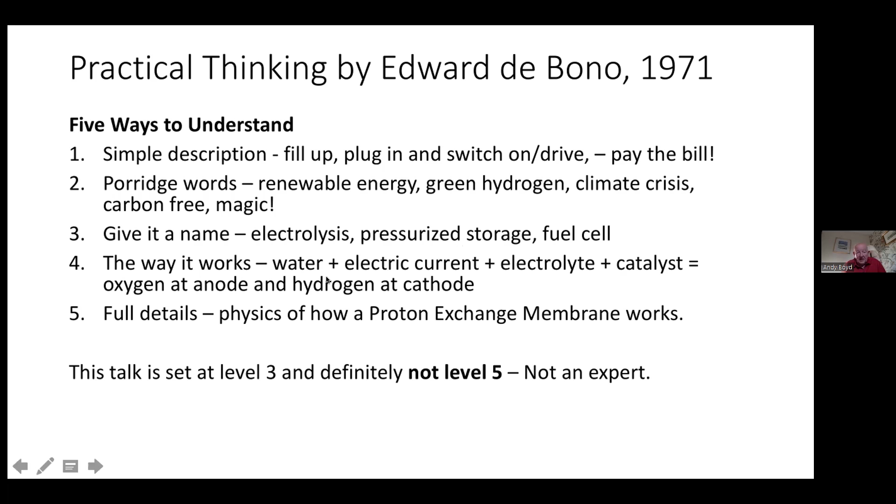So when you see these words, electrolysis and pressurized storage and stuff, don't really ask me the full details of how proton exchange membranes work, because I don't know.

Just a little bit about sustainability. Sustainable projects make things better today. If they don't make things better today, then why would you do them? And you have to do it efficiently, and you have to bank for the future. So doing something today that makes things better in the future is the banking for the future.

And the final one, the four, which is fairness, because without fairness in the system, people eventually withdraw their support and projects become unsustainable, or governments become unsustainable.

So just moving on a bit, here we are now. The hydrogen industry is going crazy. There's so much going on. Every day there's a new announcement about something to do with hydrogen.

The EU is committed to produce 10 million tons of renewable hydrogen by 2030. And that translates to about 80 billion euros. It's a huge, huge market, potentially.

Scottish Power's committed to producing something called a hydrogen hub in the Cromarty Firth, and there'll be more of these in Scotland. European gas network operators want to create a backbone pipeline network so that they can pump hydrogen all around Europe, and as a forerunner to a trading mechanism.

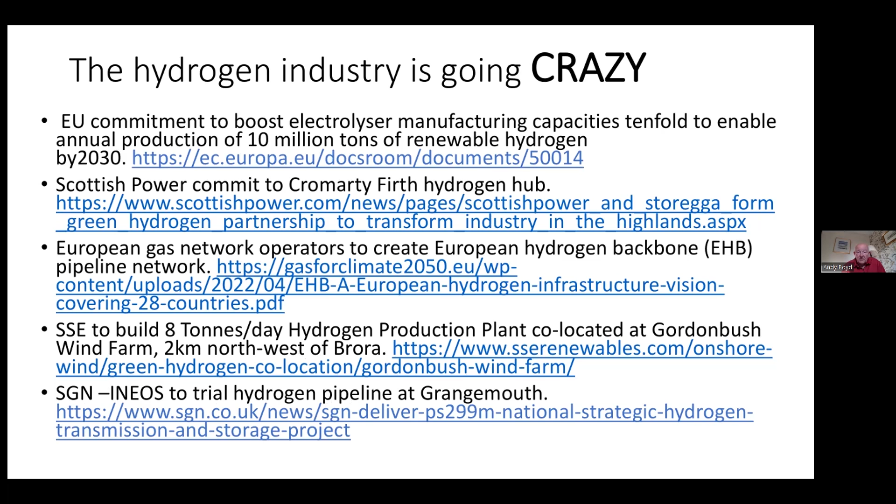So the background: hydrolysis was discovered at the time of the French Revolution, so it's been around for a long time. Hydrolysis coupled to renewable energy gives you green hydrogen. There is blue hydrogen and gray hydrogen. Blue hydrogen is made from hydrocarbons coupled to carbon capture and storage, and gray hydrogen isn't, it's the other stuff. It's been much talked about as an industry for at least the past 30 years, including in Jane's book with Malcolm Slesser, where she's got a whole section on the potential for hydrogen.

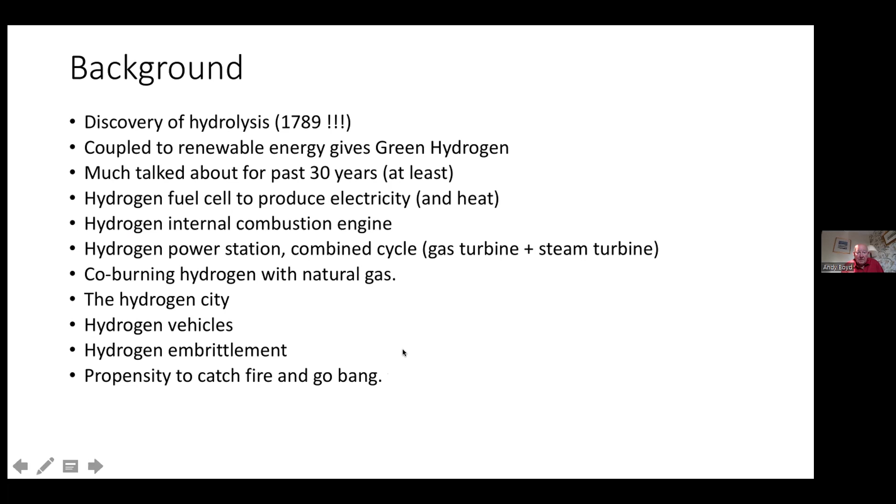And here's why. This is the hydrogen airship that caught fire in 1937. People will cite this as saying why you can't have hydrogen, because you're going to have disasters like this.

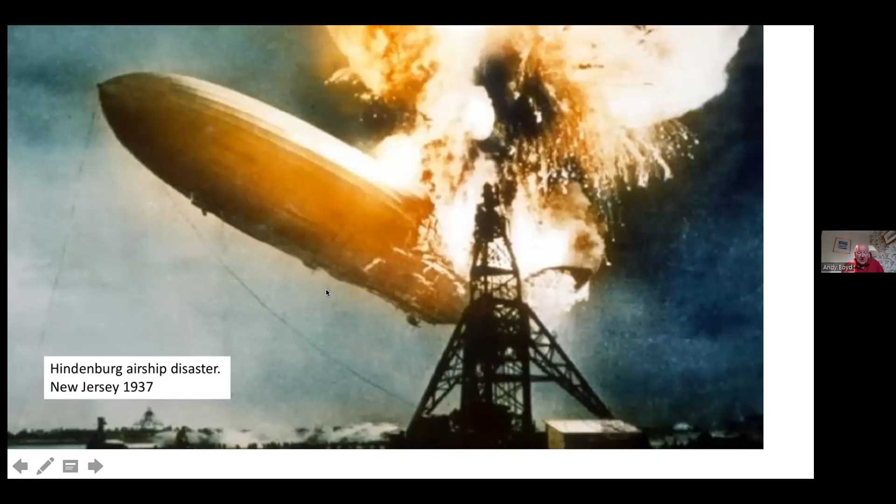More recently, there have been other disasters with hydrogen. At the Fukushima nuclear power station in Japan, there was a hydrogen explosion. Hydrogen was produced in the reactor by a malfunction, which blew the top off the reactor.

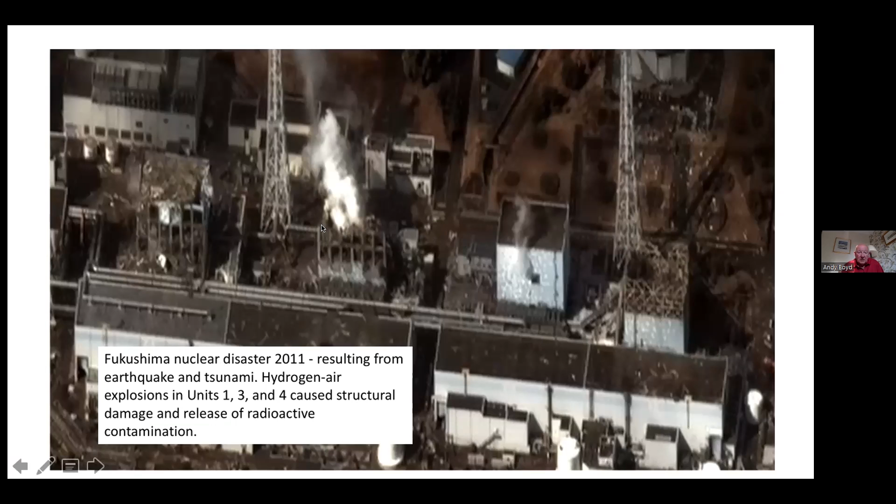And even relatively small scale things, there's something called a hydrogen road in Norway, where there are hydrogen fuel stations for vehicles along this road. And one of them here caught fire. Now, this is very interesting because this hydrogen fuel station makes its own hydrogen. There's a solar farm in the next field, and there's an electrolyser which makes its own hydrogen, and the hydrogen then goes into somebody's car who pulls up here. Very interesting. But it was a valve that went.

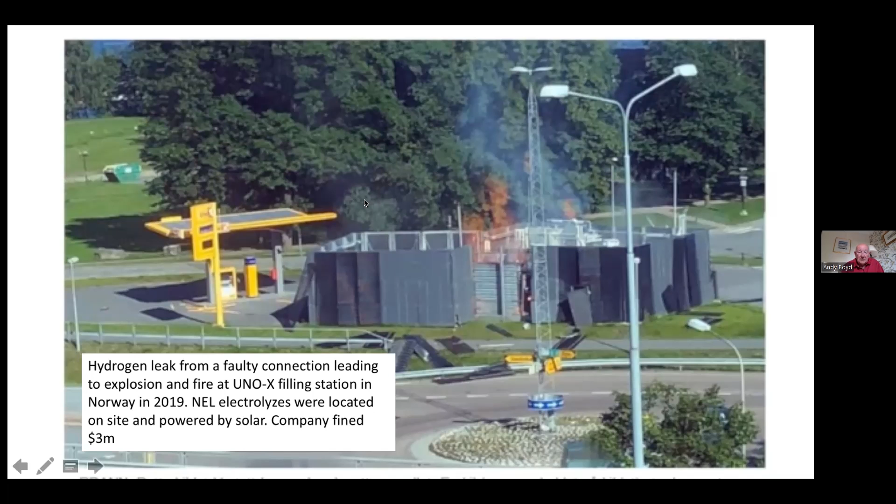So these connections between one bit of the system and another are quite susceptible to leaks, as you would expect if you had one piece of pipe joining another, it's the bit where they join where you're likely to get the problem. So there's been a lot of research and development on different types of joints. That's ongoing, but that's what happens if you don't deal with that.

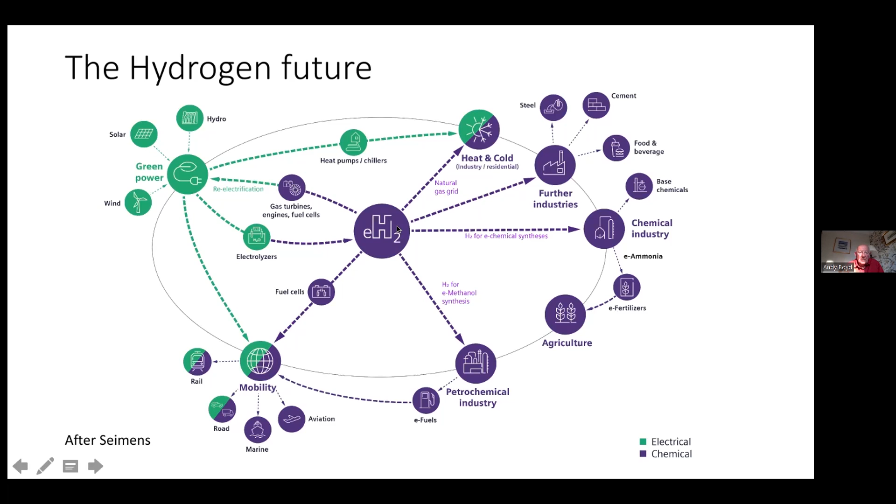We've been through this before, and it's just stuck in again. Now we're going to go on to how you make it through electrolyzers and what you do with it - production and uses.

Water hydrolysis, that is passing electric current through water, produces oxygen at the anode and hydrogen at the cathode, and this is what's called green hydrogen.

They also produce it from methane pyrolysis. That's where methane is bubbled through molten metal, and it breaks down and produces hydrogen.

The most common way of producing it, though, is through steam reforming with methane at high temperature, and that produces grey hydrogen, which can become blue hydrogen if you've got carbon capture and storage. And there are other methods.

So currently, the world production of hydrogen from all methods is about 90 million tons per year. So an EU proposal to produce 10 million tons a year is a significant part of world production at present.

It's used mostly in the petrochemical industry for the desulfurization of hydrocarbons. It's used to make ammonia, which is used to make fertiliser, and it's used for fats and oils, and even in margarine. It's used in the semiconductor industry, as rocket propellant, and all sorts of other special scientific uses. And it's used as an energy carrier in fuel cells and enhanced fuels.

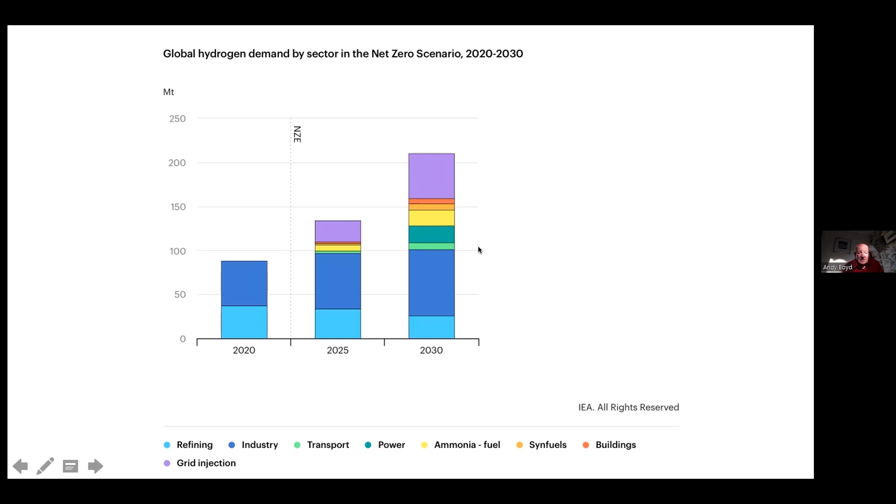So let's just go on to production. How do you make it? Well, there's alkaline electrolysis that's been known about for years - you'll see a slide in a minute - but it's an electrolyte, a cathode, and an anode. You pass electricity through it, and you get oxygen at one and hydrogen at the other.

There's something called a proton exchange membrane, which is a relatively recent development, but it's now become commercially available, widely commercially available. And there's another diagram coming up. But this is the sort of overview of hydrogen production.

The proton exchange membrane method has taken over from these other methods. There's no more Sony system for making whatever it was that didn't become VHS - I can't remember what it's called. But following along is this stuff called solid oxide electrolysis, which might become the DVD of hydrogen production. It's got some good credentials. There's a whole host of other methods coming along, all in research and development, and developing fast. But this proton exchange membrane method seems to have got the jump on everything else.

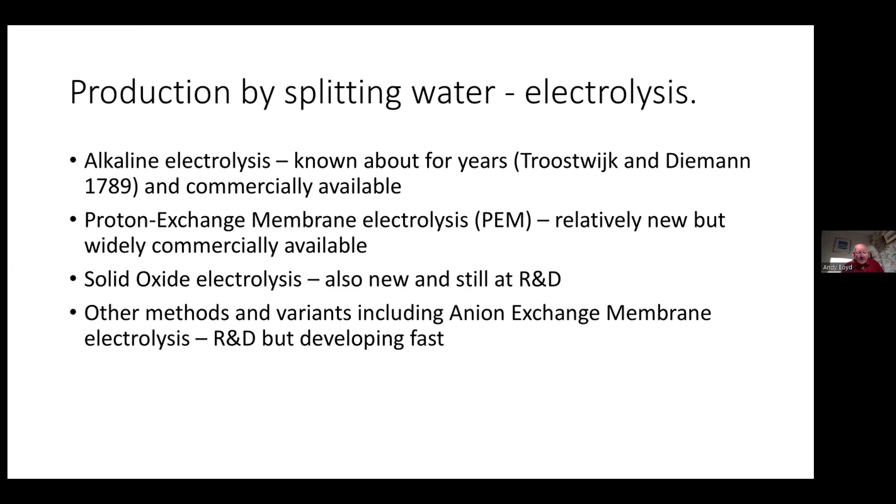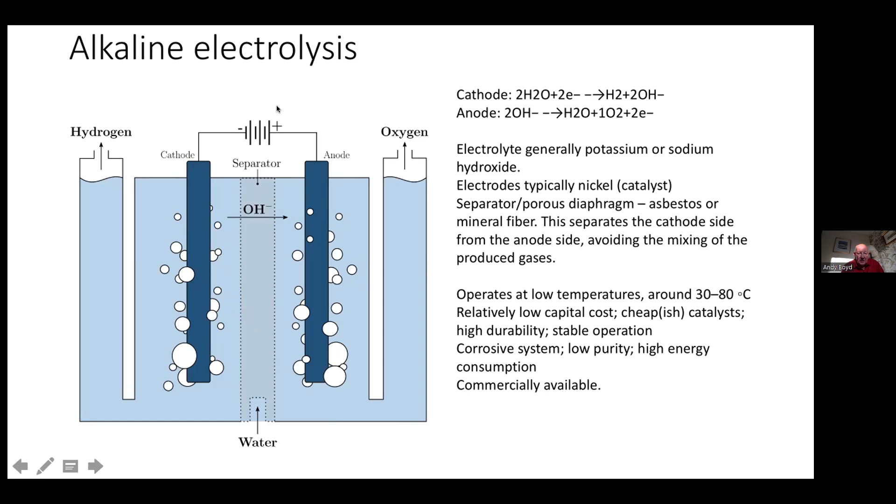So, alkaline electrolysis. This is the liquid method, using usually potassium or sodium hydroxide as your electrolyte. You have a cathode and an anode, and some sort of separator so the bubbles don't mix. You introduce water, and what you get out on this side is hydrogen, and on this side is oxygen. That's a liquid, low temperature process, and that was the preferred approach for years and years, until they came up with this proton exchange membrane method.

This is a plastic sheet. On one side, in fact on both sides but with different metals, are catalysts which become the anode and cathode. You introduce water at relatively low temperature, and this proton exchange membrane allows hydrogen ions to go through, but it doesn't let electricity through. So you produce hydrogen at one side, then oxygen at the other side. This technology is now becoming widely available. Siemens, for instance, have just built a very large factory to produce cells that do this in Berlin, and there's a very large manufacturer of these types of membranes in Sheffield.

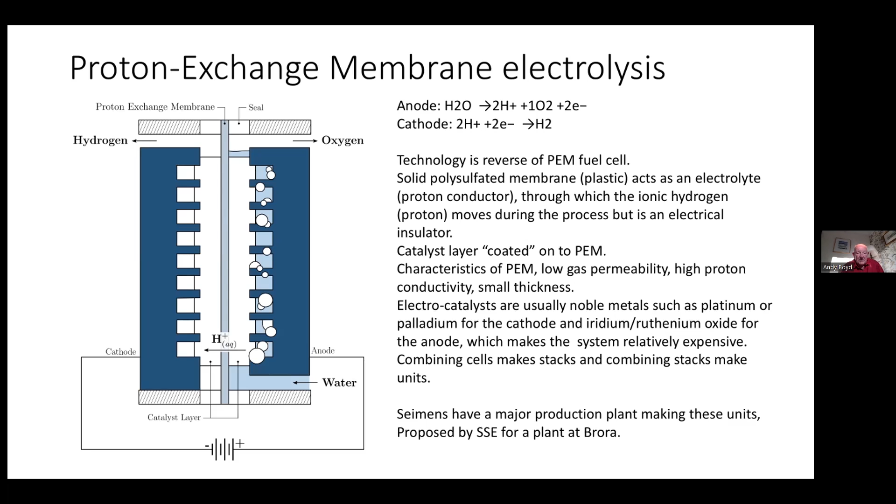The one that might be coming along, the sort of DVD that's going to replace the proton exchange membrane, possibly, but needs to run at high temperature, though has possibly higher efficiencies, is this solid oxide electrolysis method. The great advantage of this is that the cathodes and anodes don't have to be platinum or palladium or other noble metals - they can be a more affordable material, and the stuff comes in as steam. It's high temperature, and this is the sort of method for producing hydrogen they've been looking at in the nuclear industry for linking up to nuclear power stations, where you've got the opportunity for high temperature steam as well.

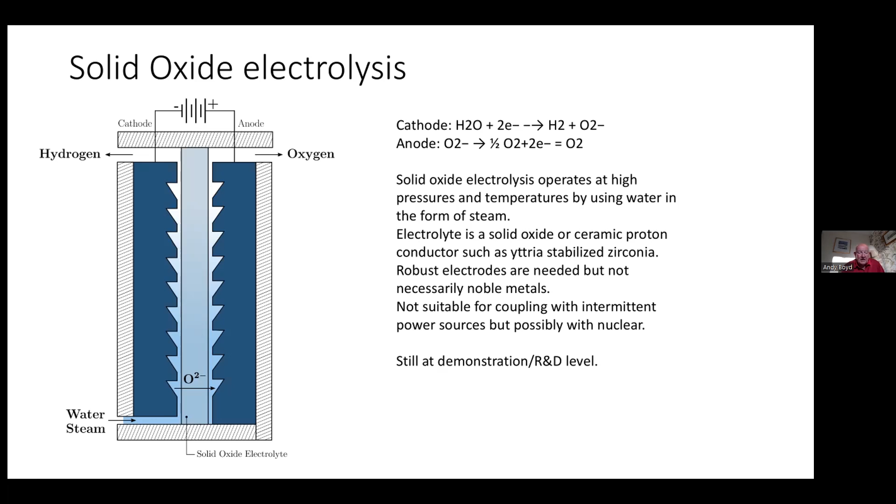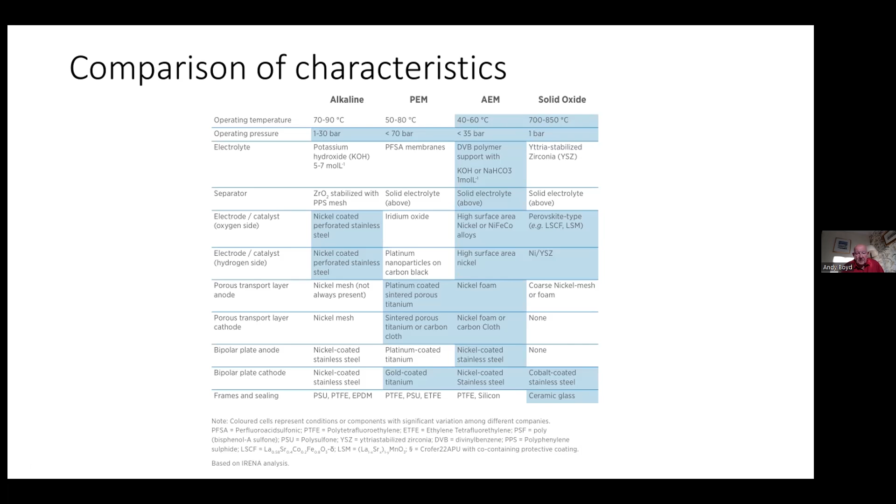This is a busy slide, which you can look at another time if you download the presentation. This looks at some of the differences between the different methodologies. The membrane method is 50 to 80 degrees C. Solid oxide is 700 degrees C. So you finish up with a different type of development altogether.

So the electrolyser is in the middle of this here, but that's not all that's involved in a system. You need electricity coming in, which you've got to rectify to direct current - if this comes in as AC, it's got to become DC. You've got your electrolyser in here, which produces oxygen, and you need to collect the oxygen from the water and take that to whatever you're going to do with it. On the other side, you have to do the same thing with hydrogen. There are various condensates produced, and then you need a gas reservoir, and a whole series of things needed - dryers, etc. - before you get hydrogen. So that bit there is only part of the system.

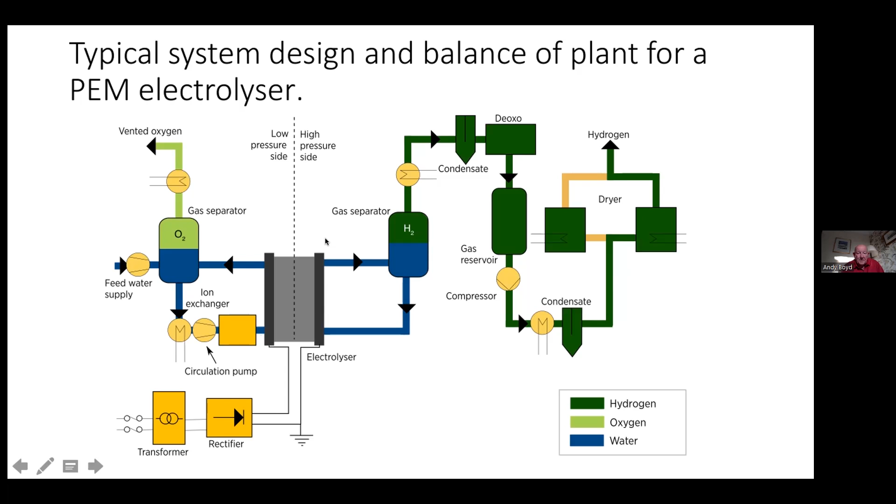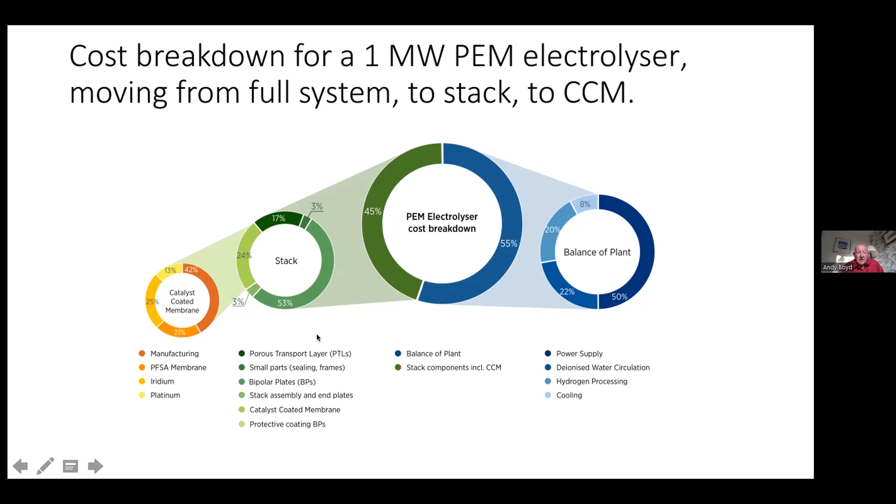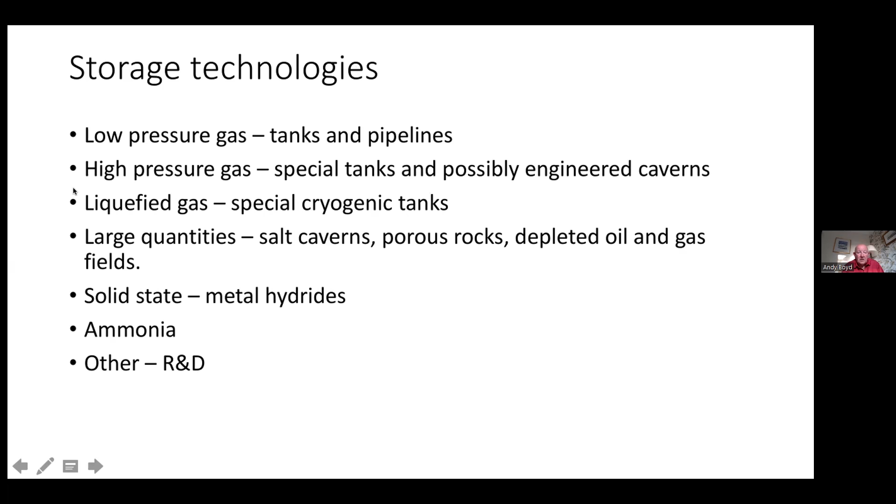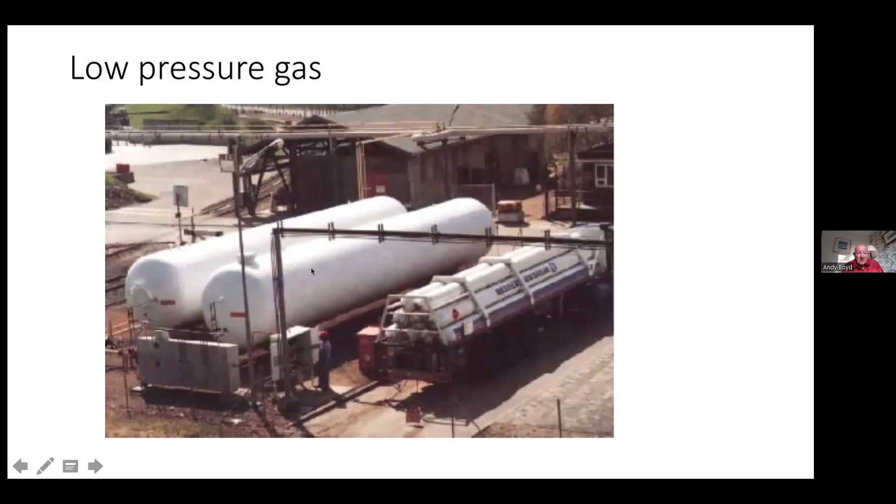So there's quite a lot of work going on about storage technologies. So here's a couple of pictures, some low pressure gas in tanks, which you can imagine as being fairly conventional. This isn't a great picture, but it talks about the complexity of compressed fuel storage tanks. These are the sorts of things that you would have in a bus or in your car, and they're impact resistant. They've got special valving, they're multi-layered, a carbon fiber reinforced shell, and probably a polymer inside here.

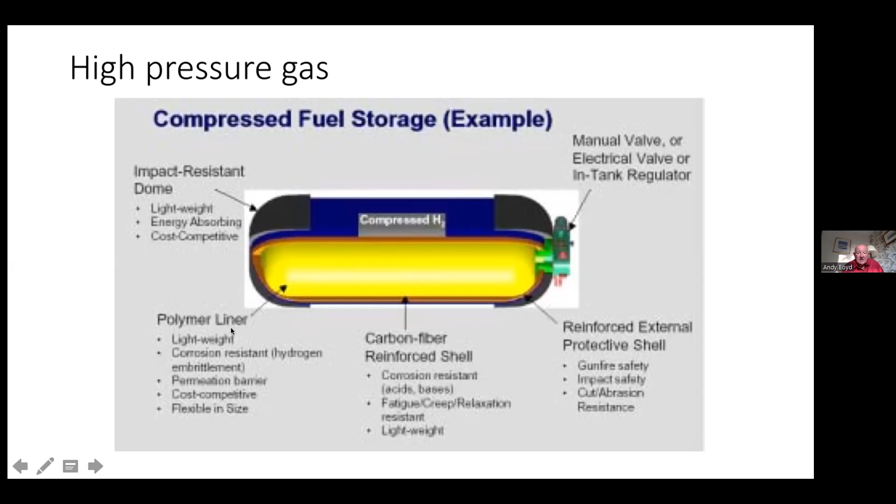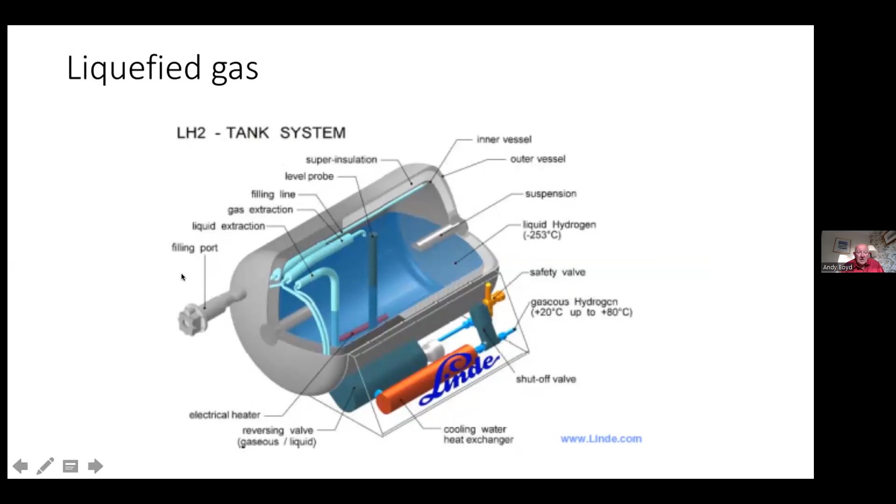And so that's a pretty specialist piece of kit, as is a liquefied gas tank, because that's insulated and gas can bubble off. And of course, when it bubbles off, it takes in energy and cools. And so again, that's a pretty sophisticated piece of equipment. And as I said, in large quantities, you can store it in rock and salt caverns.

And they've already been doing this for years and years at ICI, at Teesside, in some salt caverns. And in France, they've been storing hydrogen in porous rock. And there's talk of using, sorry, I'll go back - there's talk of using depleted oil and gas fields. And then this issue here, which is cushion gas.

So that is, if you put it in there, when you take the gas out, you have to leave some there as a cushion. And I'm not sure I understand that, but it becomes quite a problem at large quantities and in these sorts of places. And as I said, there's solid state storage as metal hydrides in porous medium. And then there's some R&D into various types of carbon-based materials that can hold hydrogen. I'm not sure I understand all this - it's a bit too much chemistry for me, but it's certainly an area for sort of specialist storage of hydrogen.

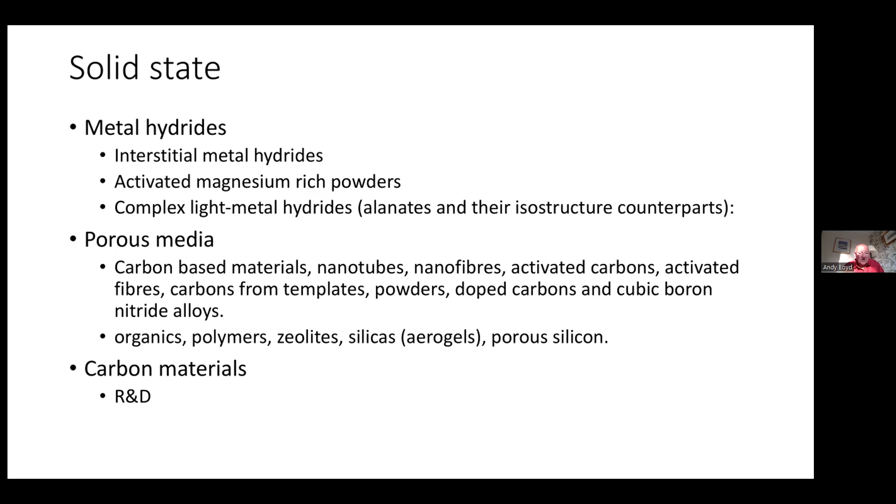So what do you do if you use it? Well, how would you use it? Well, it can be used for heat and power, for civic buildings, schools, hospitals, farms, commercial kitchens. And there you would use fuel cell technology or direct combustion.

Now, a fuel cell is the reverse of the PEM, of the proton membranes. You introduce oxygen, that's air at one side, and you introduce hydrogen at the other side. The hydrogen goes through the gap, goes through the membrane, creates water, and in so doing, drives an electric current between the electrodes. So that's how a fuel cell works, and it produces electricity, but it also produces heat.

So you can have a fuel cell in a container next to your hotel that will provide the electricity and the heat for the hotel, or a couple of containers with this stuff in it. As I said at the start, it's future use in heavy vehicles and buses and ships and cars and possibly airplanes. And again, this is fuel cells and internal combustion engines. So you might have ships running on internal combustion engines that are burning hydrogen.

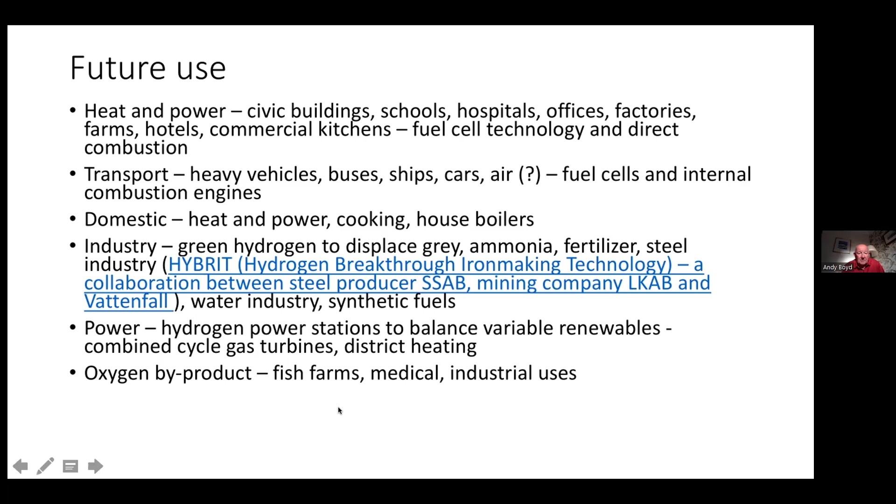So let's go on to ammonia. Ammonia is hydrogen and nitrogen - that's one nitrogen to three hydrogens. The nitrogen comes from the air. You produce this liquid, and then you ship the liquid, and you can store the liquid in tanks. They've been storing ammonia for ages, for years and years.

You then turn your ammonia into fertiliser and other industrial chemicals, and it's relatively safe. And then at the other end, when you've got your ammonia, you can break it back into hydrogen and nitrogen. It needs some more energy going in, but the round trip gives you an efficiency that looks viable. Ammonia is also a fuel, and you can burn it in internal combustion engines.

There's been a lot of interest in using ammonia as a fuel for ships. This site I've cited talks about speedboats. At this conference in Glasgow that I went to a few weeks ago, there was an ammonia-powered speedboat, which looked like something Batman would drive. It was a fantastic-looking machine, and it burnt ammonia.

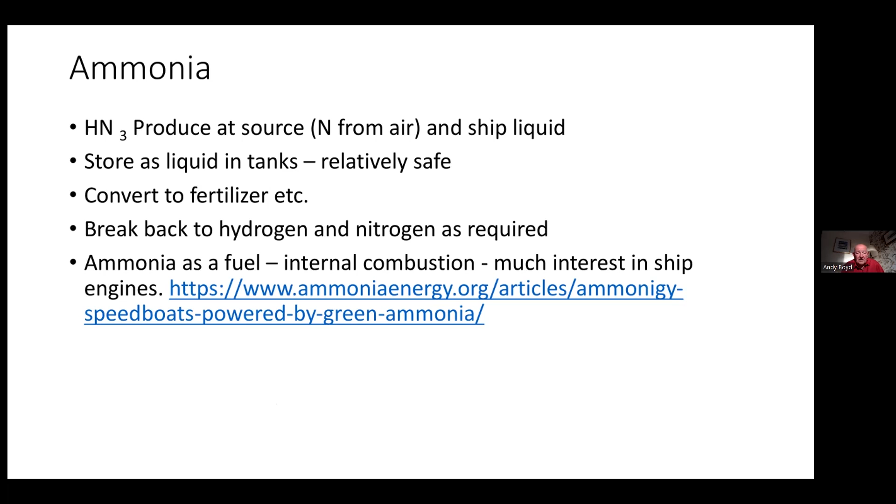Now, the problem with ammonia in an internal combustion engine is that it burns much slower and needs a higher temperature than petrol. So it doesn't really work very efficiently unless it's in slow-moving internal combustion engines, like ships' engines.

Okay, I'm just going to move on to some other terminology that's emerging - these terms of pods, hubs, and valleys. I think I've probably invented the term pod, because this is where green hydrogen is produced, and it may be used locally, or exported or collected and then moved on to somewhere else. A pod at present would be the proposed development at Brora, and the quite extensive developments on Orkney, though it doesn't count small dedicated production units which might come up.

I could imagine there being 100 plus, maybe 200 pods around the UK where there is abundant green energy. Now, hubs are centres for hydrogen collection, storage, and onward transmission, and they may include a pod or two, and some local usage. But you might get new industry using hydrogen, such as making ammonia. I could see there might be half a dozen of these in the UK, perhaps half a dozen in Scotland, and perhaps 20 in the UK.

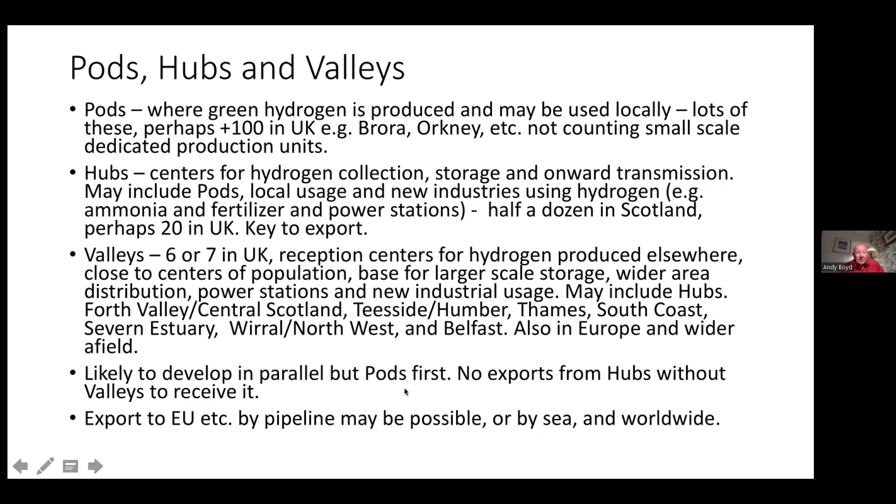So this is my next one, which is industrial supply: pods to hubs to valleys. Pods to hubs can be perhaps a short pipeline or tankers. Hubs to valleys, some sort of specialist dedicated pipeline, either a new submarine pipeline, which would be much cheaper than an onshore pipeline, or possibly repurposed gas pipelines, although I'm not convinced about that.

You could ship it as ammonia, or you could ship it using new ships to new terminals and new storage facilities. This is a picture of the world's first liquid hydrogen carrier.

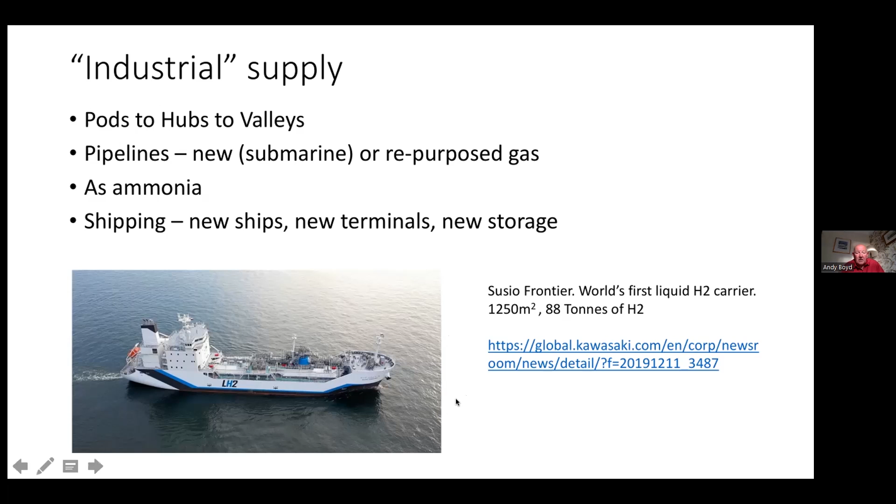It's got a tank of 1,250 cubic meters, which is not that big, and it only carries 88 tons of hydrogen. It caught fire a few weeks ago, and the fire came from one of these connections between one bit of pipe and another. So this whole question of connections and valves is an ongoing challenge for safety.

Domestic supply, and I say domestic because it's the sort of thing where natural gas would go now. There's a lot of talk and proposals from the gas companies with vested interest that they should blend it with natural gas and deliver via the existing gas network, with a large amount of storage in the pipes themselves. But the feasibility is not yet fully proven.

But old town gas supply included a lot more hydrogen—got a high hydrogen content. So there's some feasibility in there, but how it works

is being developed. You could build dedicated pipelines, and there are some dedicated hydrogen pipelines over long distances in the United States. But the best technology is still a subject for R&D, and they'll be costly onshore and cheaper offshore.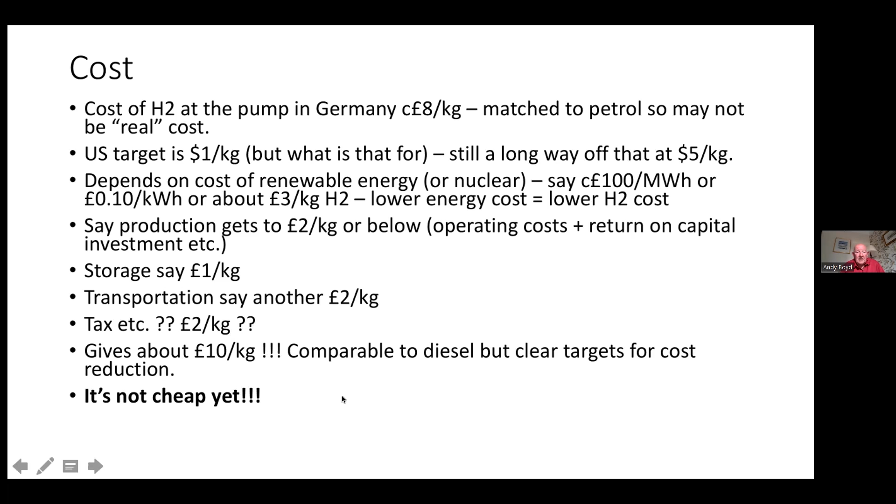And then I'm guessing again at another number for storage, because you've got these tanks to pay for and to hold, and then you've got to shift the stuff around. And before you know where you are, you're going to have some tax. So it's £10 a kilogram. Maybe it isn't as much as that—maybe you can get it down to £5 a kilogram—but it's not cheap yet. This isn't free power. Quite a long way short of it at present.

So what does a green hydrogen future look like then? Well, here are the drivers: the politics, the policy, strategy and plans. The obvious drivers are climate change and decarbonisation. There's also energy security, as we all know about with Ukraine, etc.

People are trying to reduce the cost of energy, developing new green technologies to take over from the old-fashioned technologies, to create green jobs with the potential for export. And of course, the export gives a potential new public revenue stream, which the government's really interested in if they can find something else to tax. And when you look at something that might be an £80 billion industry within 10 years, there's a lot of investment profits that people are interested in. So there's quite a lot of powerful drivers there.

And you say, well, how will the market develop? Well, I don't know—I've got a couple of slides that come onto that—but there isn't a market at present. And for a project to be considered bankable, the green hydrogen projects will require an association with an offtake contract, with a credit-worthy offtaker. So you can't sell it to somebody unless somebody's going to buy it, and you can't invest in the project unless you've got somebody to buy your product.

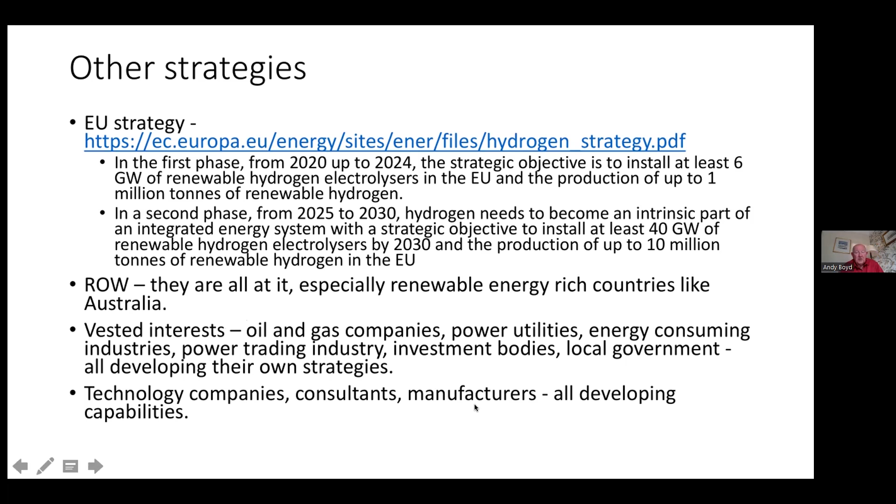The rest of the world are all at it, especially the renewable energy rich countries like Australia and North Africa, the Middle East — anybody who's got relatively inexpensive renewable energy. Then there's all the vested interests: the oil and gas companies, power utilities, power trading industry, investment bodies, local government — they're all developing their own strategies. There's quite a lot out there about what people want to do and what should be done by way of creating a market, and lots of technology companies, consultants and manufacturers are all developing their capabilities. This is growing at an enormous rate.

There are wholesalers who buy from these producers, and retailers who also buy from them, so there are people who make a living just trading hydrogen. Their suggestion is that they'll trade hydrogen through things called hydrogen purchase agreements and carbon offsets — so there could be a whole financial industry developed similar to the electricity industry, all adding cost, via these hydrogen purchase agreements or other sorts of wholesaler-type agreements.

There would also be a safety regulator, likely the Health and Safety Executive, and a market regulator — is that going to be Ofgem, or H-gen, or something? I don't know, but that doesn't exist yet either. Of course, the Treasury would love to get its hands on this because it's tax revenue, and there might be some rebates depending on the arrangements — you tax somebody, but somebody else gets a rebate.

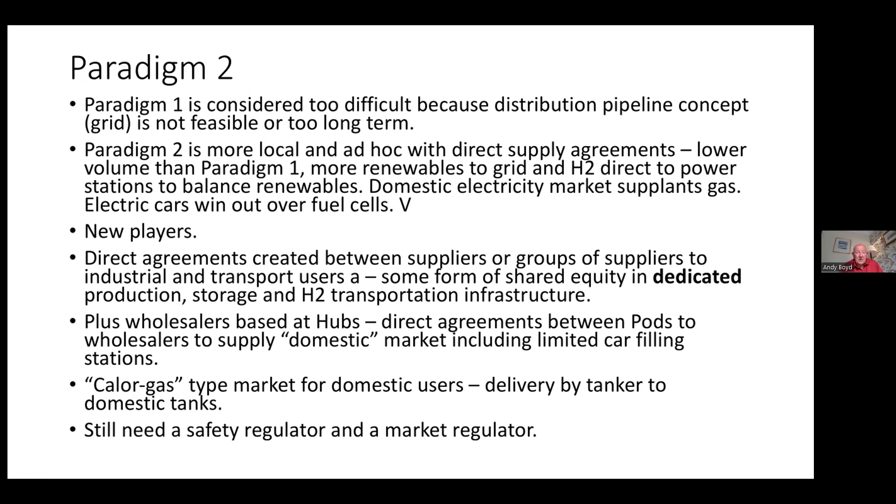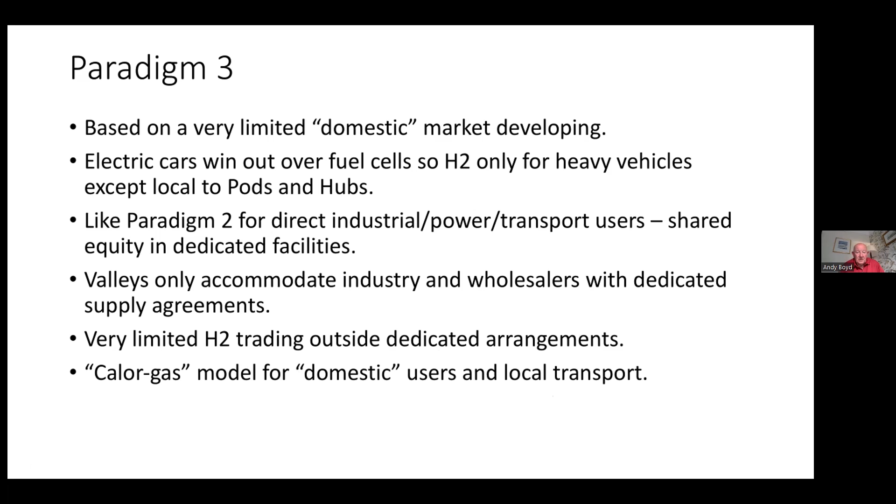So you might start with something that looks like number 3, move on to something that looks like number 2, and eventually finish up at number 1. But it's all too complicated.

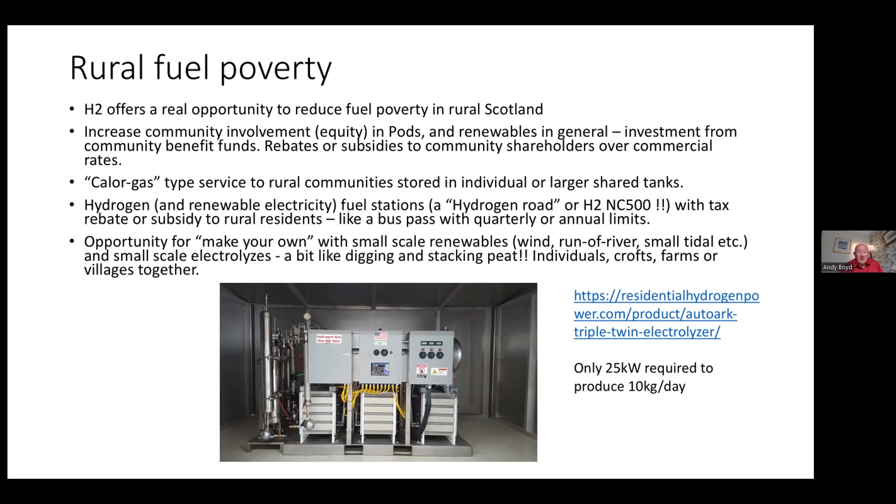All right, so I'm coming towards the end now. This stuff is happening very quickly. There's so much going on in the industry now, it's very difficult to keep up, and it's just going to keep getting faster and faster. There are very strong industry pressures because there's lots of money to be made out of this. I think the politicians are slow to keep up because there's actually quite a lot of science in this, and it's not certain what's going to happen. There are lots of technology developments, but some market leaders or some technology leaders are emerging. So if we come back here in 3 or 4 years' time, the politicians might have caught up and the technology might have settled down a bit.

Safety regulation is coming along, but it's a big difficulty, especially if you need new legislation, and the whole question of safety standards is very, very difficult for people to develop. And you've only got to get one fire or one explosion, and the whole safety regulation goes into question. I think there's a great danger of getting things wrong in this turmoil. I think that politicians and technologists can take the wrong direction, and I think there'll be some people falling on their face as a result of this.

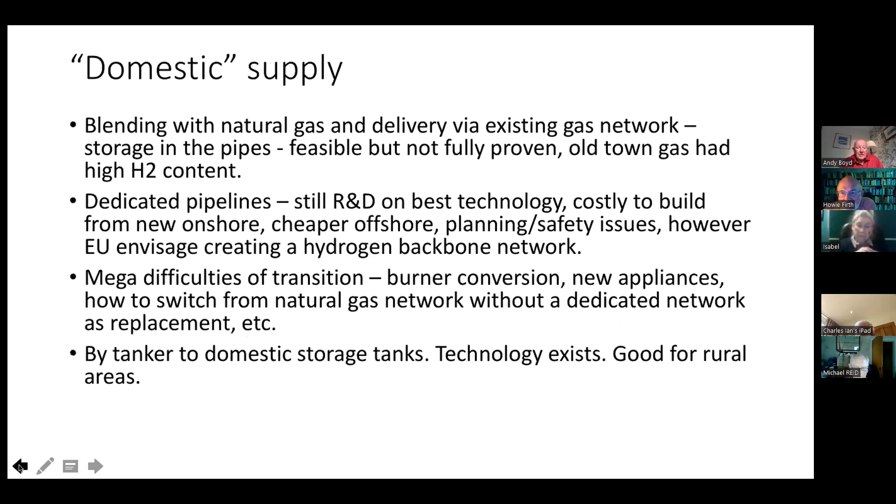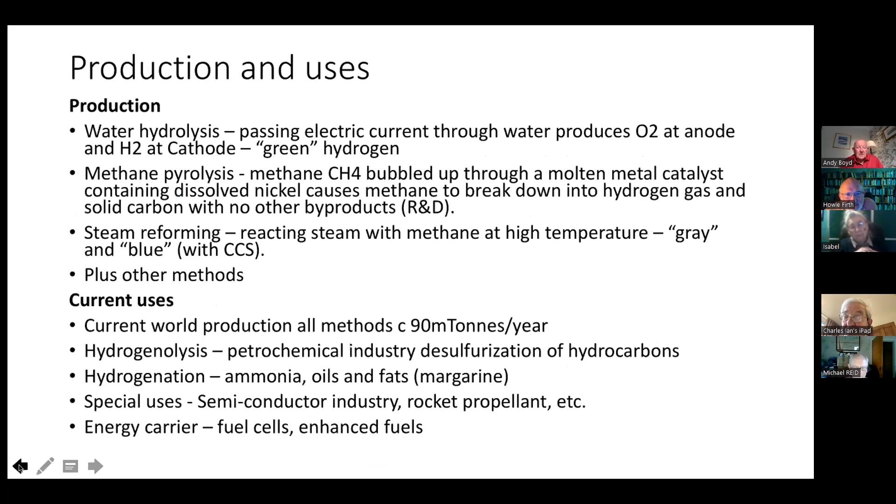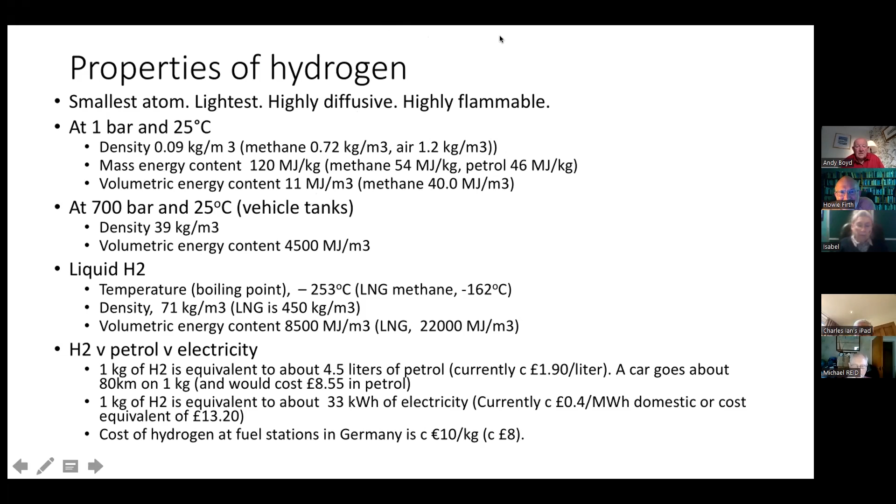And oh then... no, I was going to go back to that thing I started with, which is the next one down, which was that one. Okay, which was properties of hydrogen, because a lot of potential questions will, I think, probably require me to look at those numbers, because I can't remember them all. There's too many zeros and things in it. The one advantage if you unshare your screen is I think everybody will see each other. But it's okay. If I just do that, and then you could go back to it. Yeah, stop there. That's it, and you could go back to it there, and that way I can see the faces and the expressions and the signs of a question.